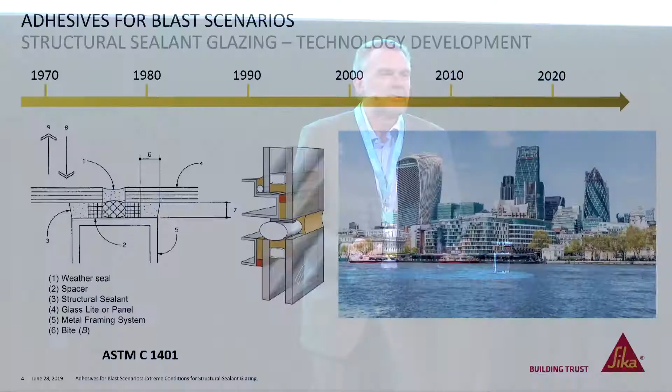At that time, the shading opportunities and temperature control were very limited, and therefore we used the silicones. And when we look into 2019, it's still the silicones. Yeah, for sure, we don't have any other options in terms of UV stability for the time being.

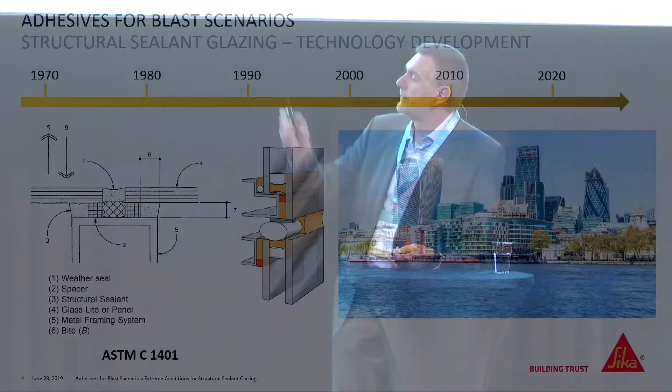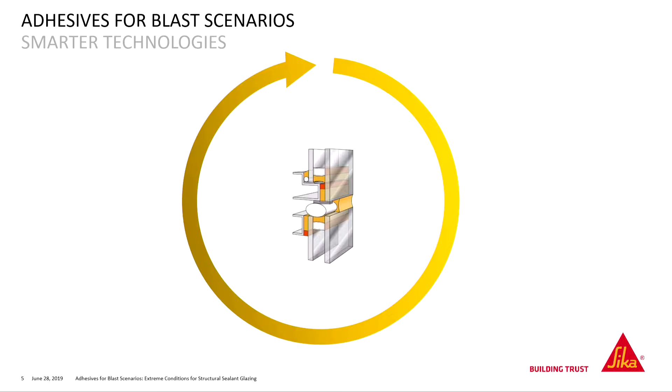At that time, there were still simple construction, little shading devices. But meanwhile, the building industry, the facade industry, had to deal, or was able to deal, with alternatives, with smarter technologies.

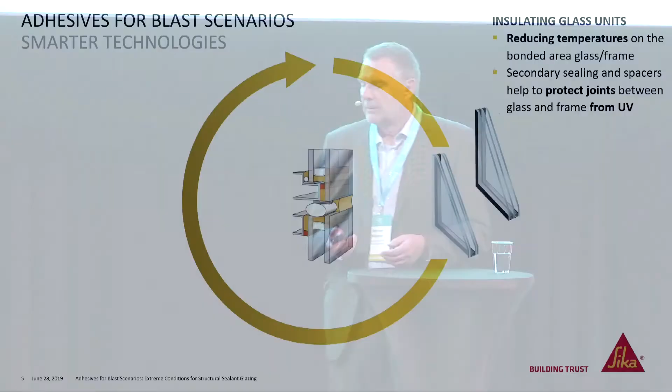First of all, it was the introduction of the insulating glass unit, and especially in this situation here, there is almost no direct sunlight, no direct sun radiation to the bond line.

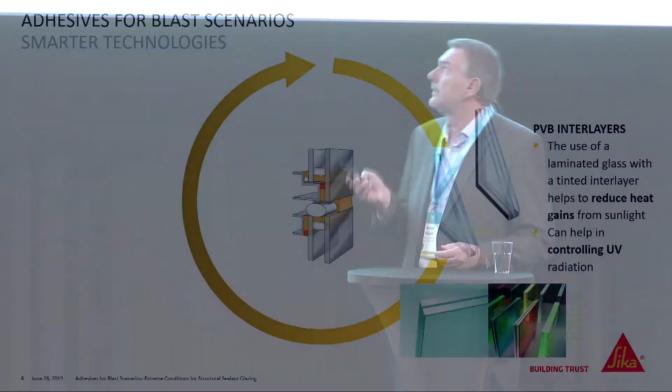Next comes the PVB interlayer. One interlayer absorbs about 95% of the UV radiation. So it's not directly exposed anymore to the bond line, to the UV.

Then we talk about thermal breaks. For example, in this particular situation here, the thermal break prevents a direct thermal conduction of the heat to this bond line.

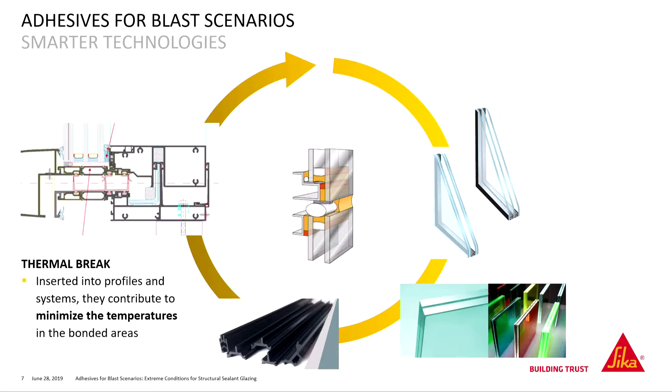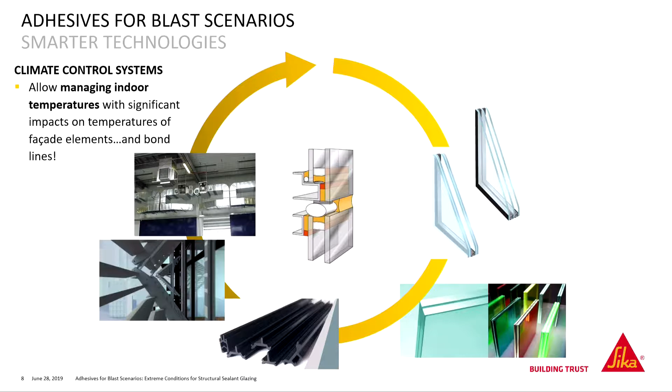Then we talk about climatic control systems, especially when it comes to these shading devices. That also helps a lot to get the temperatures under control and also the UV radiation.

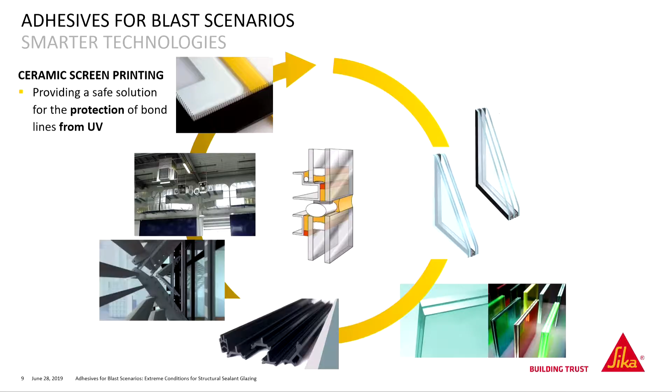Then on top of that, we talk about ceramic printing. Meanwhile, we don't talk about screen printing anymore. There are digital printing opportunities, which makes it much easier to put on a protective layer.

And last but not least, we have software for building physics to evaluate, to predict extreme conditions, and to prevent extreme temperatures in the system. So altogether, we have nice, valuable opportunities to get the temperature and the UV radiation under control.

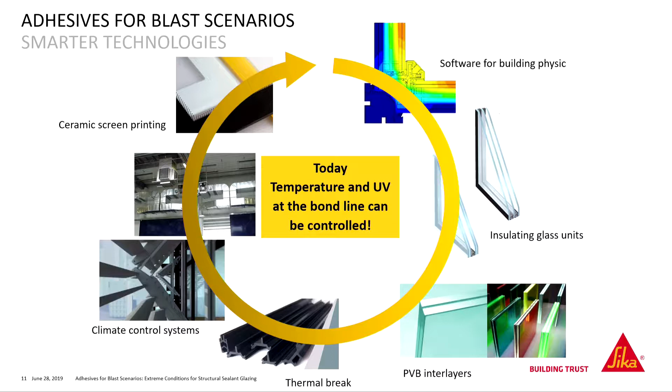So we have smarter technologies, but with smarter opportunities comes more demands. Today, we have very complex geometries. We are looking for high transparencies, meaning bigger glass panes. We can do that, but on the other side, we also are going for bigger joint bites.

Then we talk about cold bending. It was worth a total session yesterday, talking about cold bend glass, and this causes higher strengths, higher static loads, higher permanent loads.

Then we come to these extreme dynamic loads under blast conditions. Fair enough to say that these are the most extreme conditions for the bond line.

On top of that, we talk about sustainability. It calls for new materials. It bans old, tried and tested materials sometimes. So this whole construction chemical industry is under revision and under scrutiny.

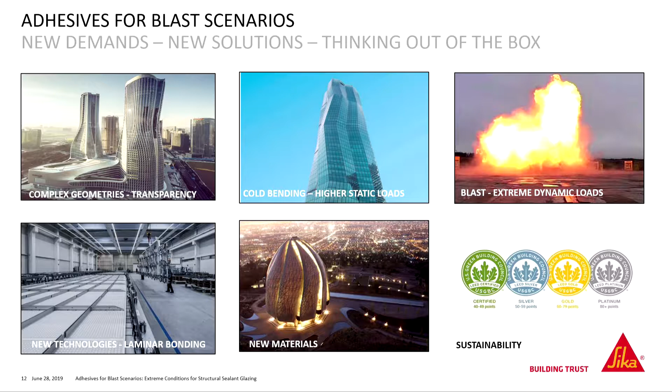But all these demands are answered with new technologies like laminar bonding, as we call it, opaque facade panels, fixation for opaque facade panels, and the industry answers with new materials. And these new materials aren't just the substrates the facade is built of, but we can also think of new sealants and adhesives in the construction and facade industry.

When we look at these opportunities, about epoxy or acrylic sealants, crash-resistant PU adhesives, silicones and PU adhesives and PU sealants, you will notice quite a tendency from very high strength and rigid bonding to lower strength elastic bonding. This kind of hockey stick doesn't go in the direction we would like to have, but it's a matter of fact that we have this kind of behavior.

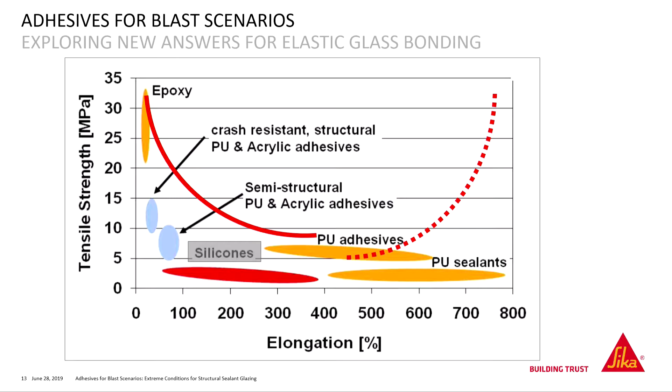Then, when we talk about these silicones, here we are in almost the worst situation. We need the flexibility for elastic bonding, but the strength is limited by the chemistry.

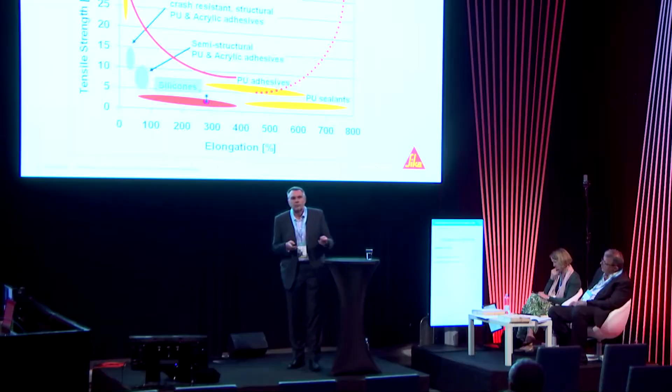Six years ago, at the same event here at GPD, I presented a high-strength silicone, a development by Sika, moving the tensile strength from 2 megapascal to 3 megapascal. That sounds very limited, not very much, but for the silicone industry, for the structural glazing silicones, it was almost a quantum leap. It was an increase of 40% of design strengths.

But we would like to get to higher strengths, and this is only possible when we think about polyurethane adhesives. That's a very provocative approach, but I think it's worth thinking about.

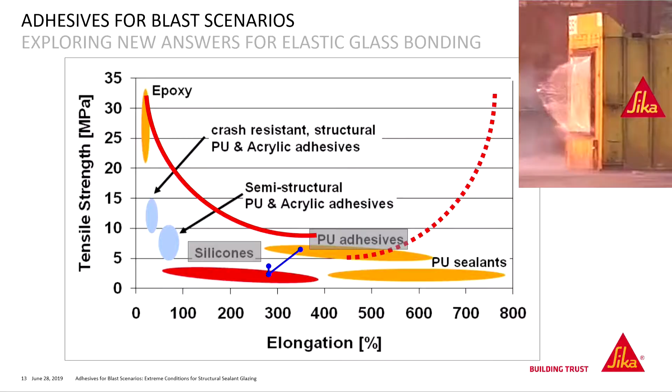When we compare the mechanical properties of a typical structural glazing silicone, a two-component silicone, we talk about 2 megapascal, and I have selected for comparison a polyurethane from the transportation industry, from the train industry. Here we talk about a tensile strength of 6 megapascal.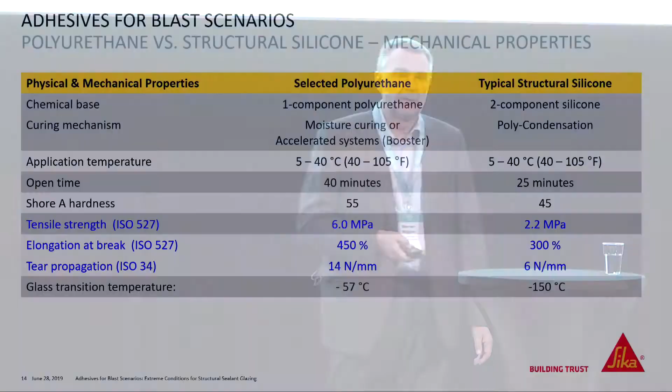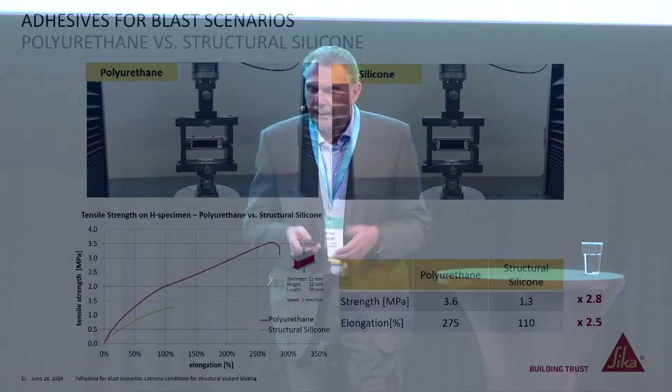Okay, we know polyurethane have their limitations. UV resistance for sure. On the other hand, also temperature stability. And therefore, we have compared some results for structural silicone and polyurethane. I would like to show you at the beginning, as a start, the behavior of silicone and polyurethane.

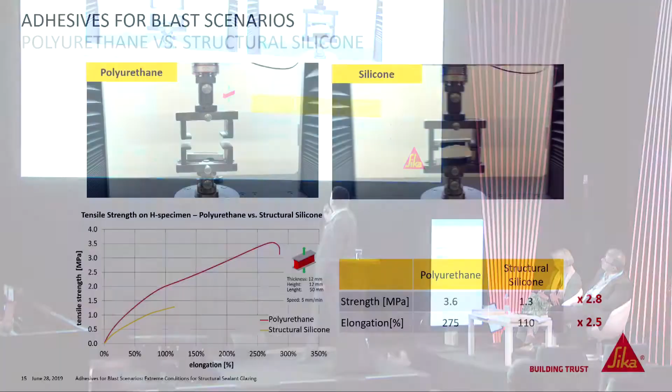So I think that's quite impressive. And when we look at the values, we have almost 3 times higher tensile strength, 2.5 times higher elongation at break. So that paves the ground, that sets the environment for further tests.

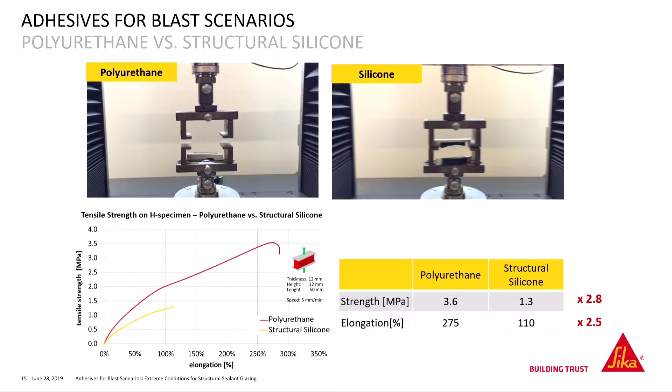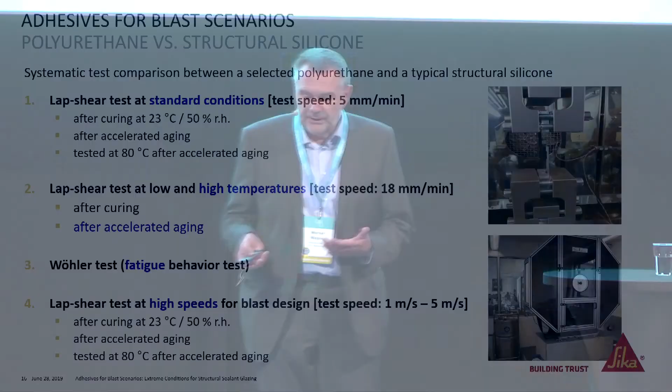And we tested again the lap-shear strength, because we are talking about - I would like to drive this discussion and this thinking into the area of bomb blast testing, where we need high lap-shear strength. So we tested it under standard conditions and did some aging testing. Then higher temperatures, because polyurethanes are also supposed to give in or get weaker above 80, 90 degrees. That's almost a no-go, that's the common understanding of polyurethanes. Then fatigue testing, fatigue behavior, and last not least, how do polyurethanes behave under high-speed impact?

So we have done a lot of tests, and first of all we tested it under standard conditions. If you look at the structural silicone and the polyurethane, it does not look very different. But when you look at the right ratio here, silicones are working here, and this is the end of the polyurethane here. So that's quite a big difference, and I think it's worth doing more investigations on that.

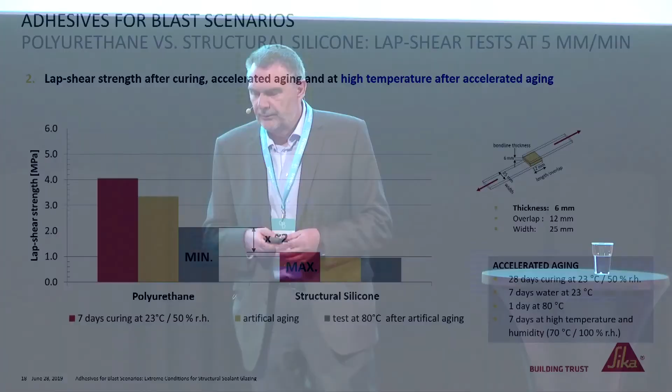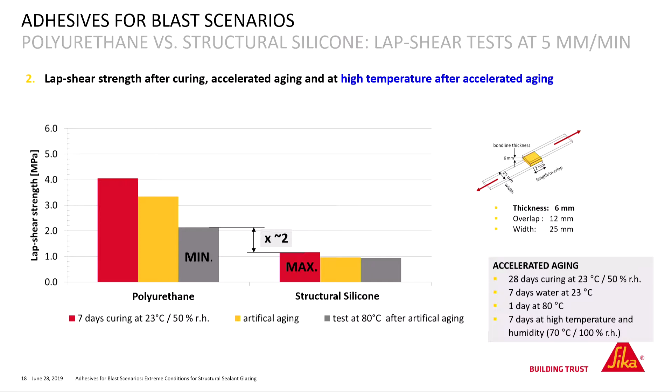Then let's come to high temperature behavior. We did it even after accelerated aging. And when you look at these bars, at the diagrams, if we compare even the maximum we can achieve with silicone and the minimum at high temperature with polyurethane, it's already a factor of 2, or it's still a factor of 2 times higher than the silicone here. And this was measured at 6 millimeter thickness.

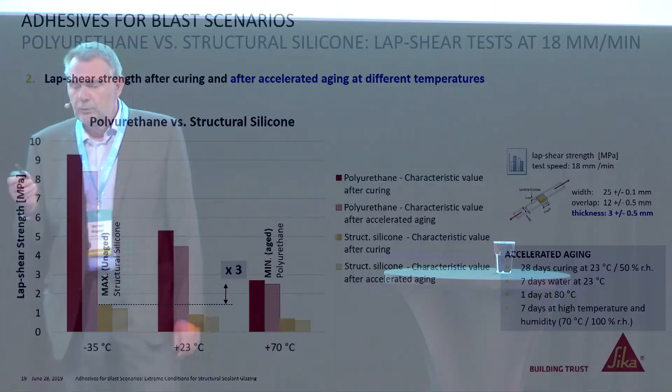When we go to 3 millimeter thickness and do more comparison at various temperatures, minus 35 degrees, plus 70 degrees, and we also compare the worst case for the polyurethane, the best case for the silicone, it's still a factor of 3, where the polyurethane outperforms the silicone. Okay?

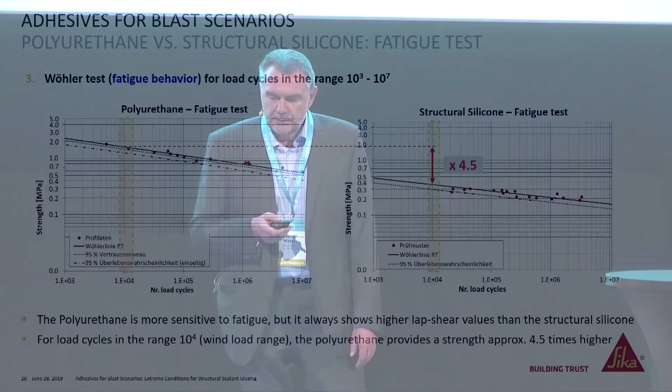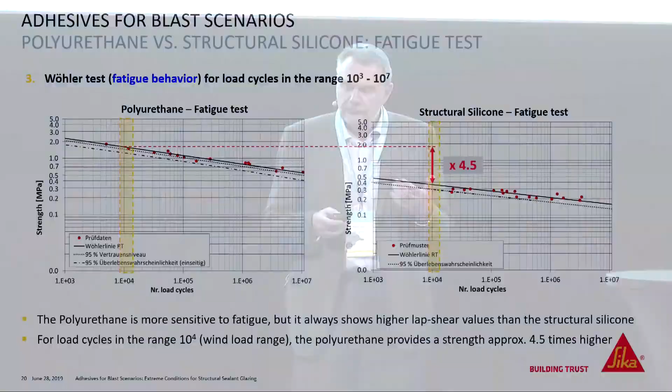Then let's come to the fatigue behavior. Polyurethane is said that under fatigue, under cyclic load, it's not the best performer, but that really depends where you start from. And after 10,000 cycles, in this yellow range, polyurethane is still 4.5 times higher than the silicone here.

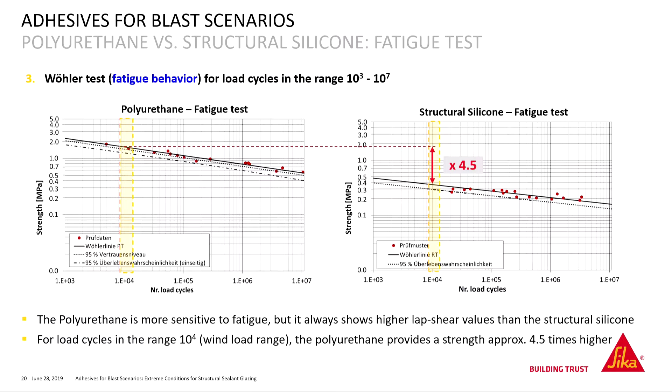Then let's look at high-speed behavior. This is essential for use in the bomb blast scenario here. And we have measured at 3 different speeds, impact speeds between 1 and 5 meters per second. It's quite a common understanding that the glass reacts to the bomb blast impact with a maximum speed of 4 meters per second, but to be on the conservative side, we start at 1 meter per second.

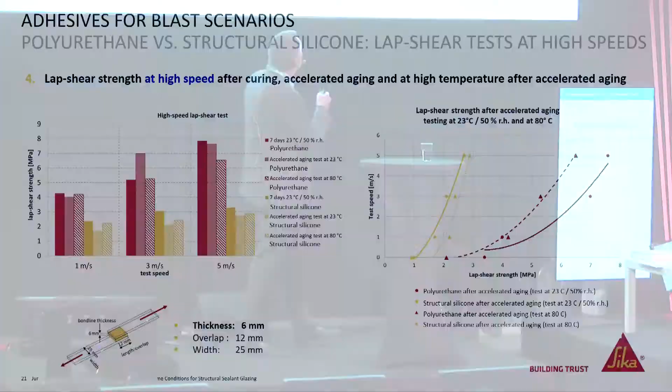And when we look at this here, this 1 meter per second test speed and the lap shear strength, we have a factor of 3, and even under the worst condition here, at high temperatures, comparing with this graph, it's still the same ratio. So that means that at high speed, the polyurethane also performs better than the silicone.

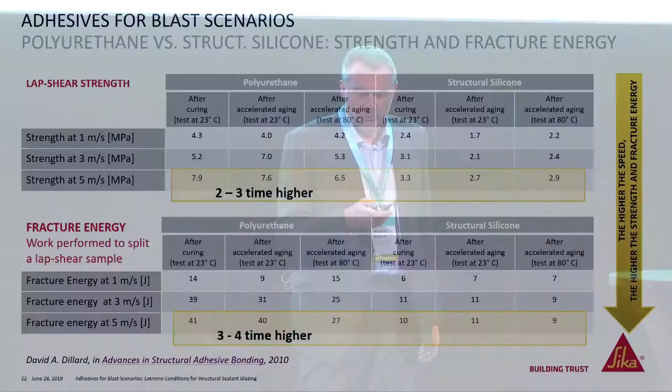Okay, then this was the comparison of the lap shear strengths here. And when you look at the fracture energy, the work you have to apply to fracture the lap shear sample, it's even better. We have a 3 to 4 times higher value for the polyurethane.

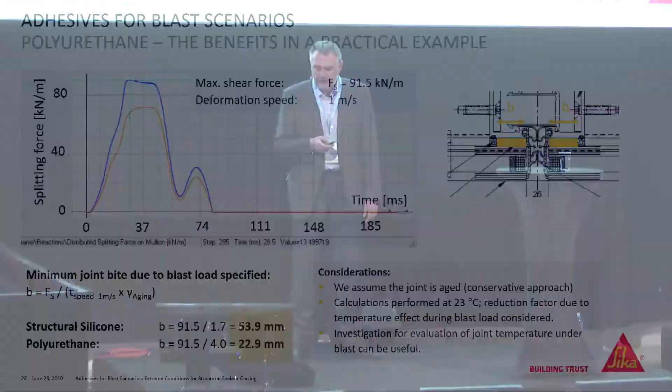Let's come to a practical example. We got some values and parameters from a customer with a maximum shear force of 91.5 kilonewton per meter at the highest peak. And when we calculate the joint bite, applying the tau at 1 meter per second, we come to a joint bite with silicones of almost 54 millimeter and with polyurethane of 23 millimeter. That's a significant difference. Yeah.

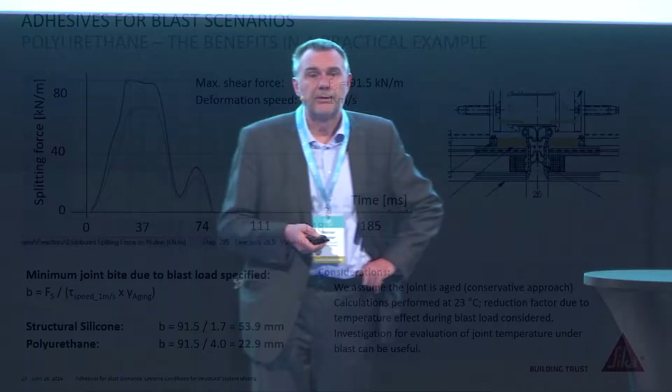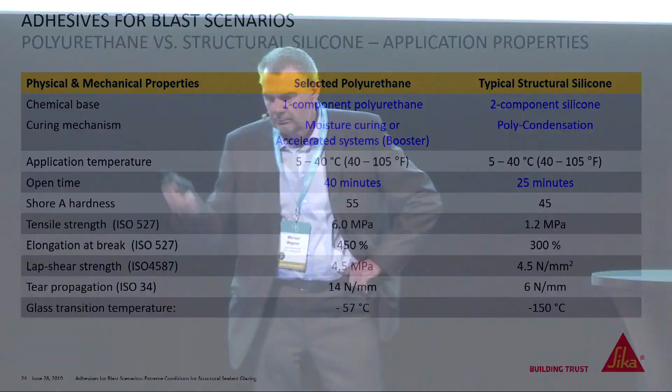So now let's look at the application. The mechanical strength, even under aging, was already to some extent convincing. Now let's come to this application, because this is also important for the production of the units.

We compare here a typical structural glazing silicone, a two-part product with an open time of 25 minutes. Everybody who has been in this business and in the workshop knows there is a lot of room for improvement in terms of waste because of short open time.

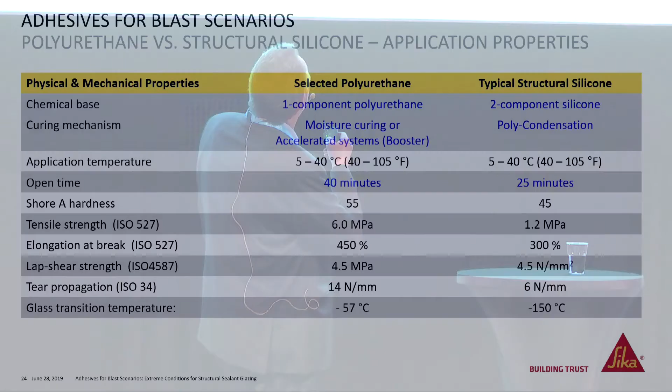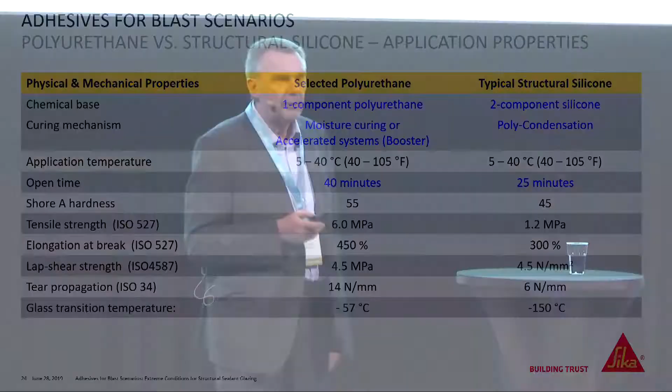And here we compare this with a polyurethane, a monocomponent, accelerated product which is tried and tested in the transportation industry. We have about 40 minutes of open time. So that's a nice approach here.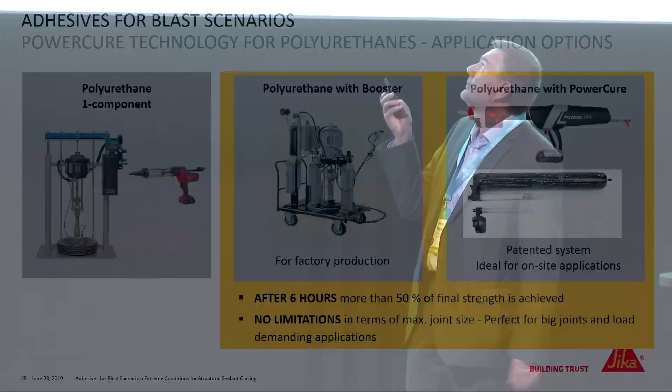Now let's come to the individual application itself. A one-component polyurethane is applied here with a one-component gun, Unipack or sausage gun, or with a simple application machine. But here we would like to introduce to you this polyurethane with a booster.

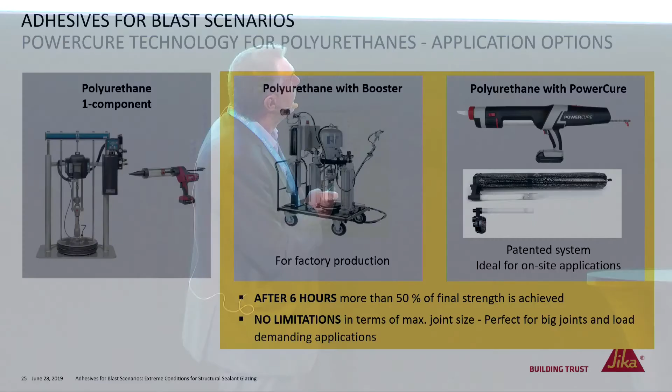We call it booster because you have a Unipack, a sausage, with a booster paste, which is a paste-like water-containing agent. And this is used in a mixer, in a dynamic mixer.

The advantage of this is it's applicable as simple as a one-part material, but it cures very fast. It reaches 50% of the final strength after 6 hours.

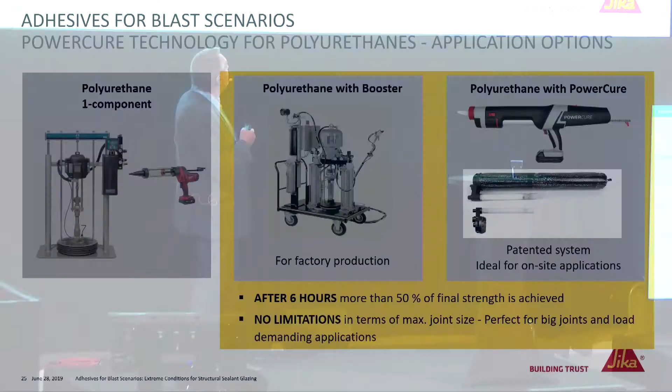And on top of that, we have a nice behavior here. There is almost no limitation of the maximum joint size, joint bite. When you consider one-part silicone or one-part polyurethane, maximum joint bite is limited to 15, 18 millimeters maximum. Here we can go to 20, 30, 40 millimeters, as long as you can apply it properly.

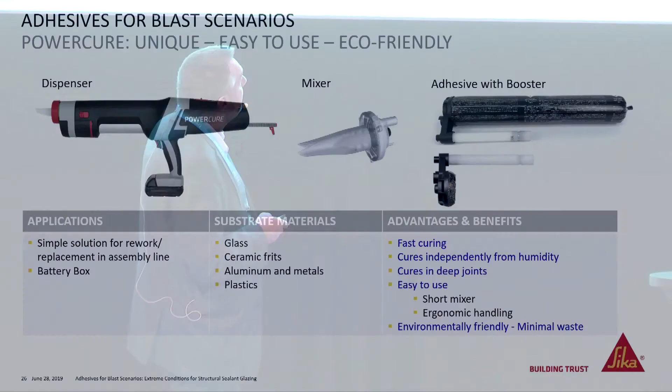Okay, let's look at these details a little bit more. The polyurethane application is very simple here, and it bonds very well on glass, on ceramic frits, which is important for bomb blast resistant glazing under these conditions, also aluminium, metals, and plastic.

On top of that, it is really fast curing. It cures independently from humidity. It cures in deep joints. It's easy to use, a short mixer, ergonomic handling with this gun, and with minimal waste, it's eco-friendly.

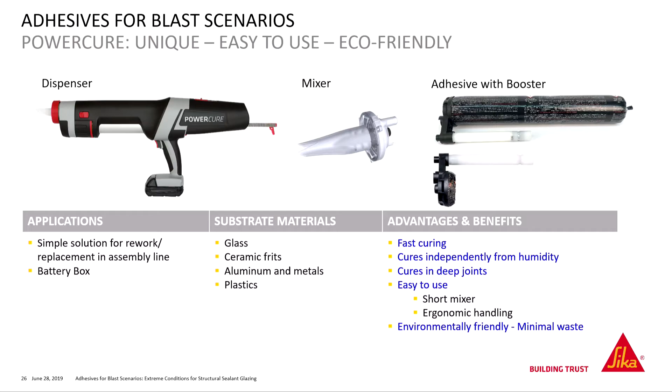Let's have a look at these tried and tested applications with this polyurethane. When you look at the parameters in the train industry, the size of the glass panes here is 2 meters by 1 meter 50. That's very similar to a facade element.

The wind loads are 6 kilopascal. In Europe you don't reach it that much, in Asia yeah, okay. But here, when two opposing trains are passing in the tunnel at the speed of 250 kilometers per hour, we talk about a static pressure of 15 to 20 kPa. This will never be met by wind loads in reality.

And meanwhile, we have about 40 years of experience with polyurethane in the transportation industry, in trains, buses, trucks, ships, and so on.

Okay, let me summarize that. In the 1970s, silicone technology was the only option, no matter what. And it's still the tried and tested solution. We also sell this, for sure.

But I think as facade technologies are changing, there are new developments for shading devices, screen printing, and so on, and the demands on facades are getting bigger and bigger. I think it's really worth thinking about new alternatives. With polyurethane, with these PowerCure systems, high strength, high elongation, high fracture energy, smaller joints, minimized frames, increased transparency, fast curing, fast on-site glazing solutions, this is really worth thinking about.

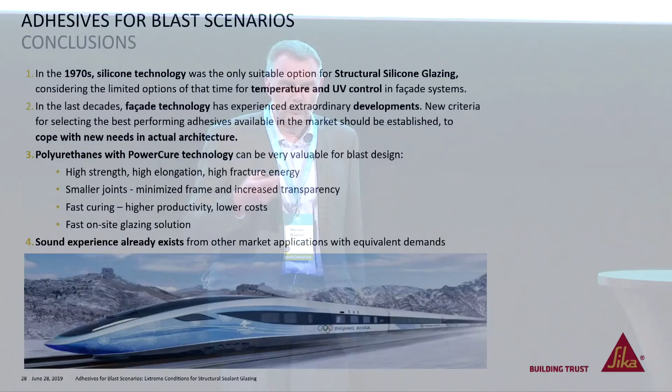So we are trying to introduce a sound, experienced solution for the structural glazing application. So if you look at this train and you compare a high-rise building, you put it just upright, where is the difference? Thank you very much.

Thank you, Werner, for questions. It's very provocative, isn't it? Well, that's what we call thinking out of the box, or peeping over the fence. Are there any questions for Werner? Sure. Yeah, Agnes.

So just to clarify, first of all, thank you, very good presentation. Just to clarify this, are you saying that there are absolutely no limits in terms of UV exposure and temperature, material temperature, for polyurethane, or are there still some limitations?

No, there are still some temperature limitations. So I would not go beyond 80 degrees, real temperature. UV? For sure, this is not changing the paradigm that this polyurethane can never be as UV resistant as a silicone, no matter what. Yeah, you can put enough scavenger in that, you will boost it, but no matter what.

Just to make it clear, we are talking about this bomb blast resistant glazing, which happens here in this podium area. We don't replace structural glazing silicone on the whole high-rise building. That's not our intention. We just want to think out of the box about bomb blast resistant glazing.

New provocative questions? I think we are already looking forward to the show, huh? Everybody's thinking out of the box. Out of this box, huh? Okay, so let me finish it. Thank you very much again. Thank you.